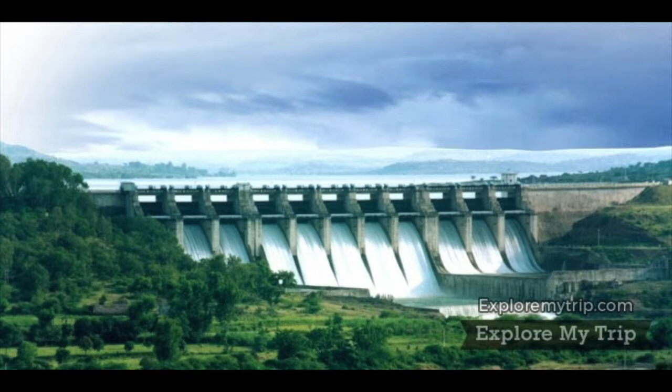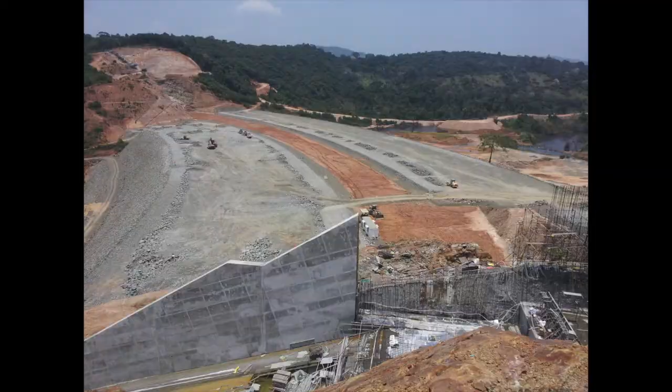It is an undisputed fact that irrigation plays a key role in the development of states where more than 50% of the population is dependent on agriculture. Heavy project costs, land acquisition, forest clearances, rehabilitation, and resettlement issues are the main constraints limiting development and giving rise to social discomfort. Needless to mention, a number of water resource projects suffer time and cost overruns on this count. The issues of consistently reducing per capita availability of water and the impact of climate change are factors sharpening the edge of the challenge.

It is submitted that the indigenous technology, namely MRIVAP - Mata Ramai Irrigation Value Addition Program - is a boon, addressing all the limitations, constraints, and challenges to a considerable extent, ultimately facilitating accelerated irrigation development while upkeeping various policies. The technology is at scaling stage on various projects in the state of Maharashtra. This is a sincere attempt to take the technology to various states for accelerated national development.

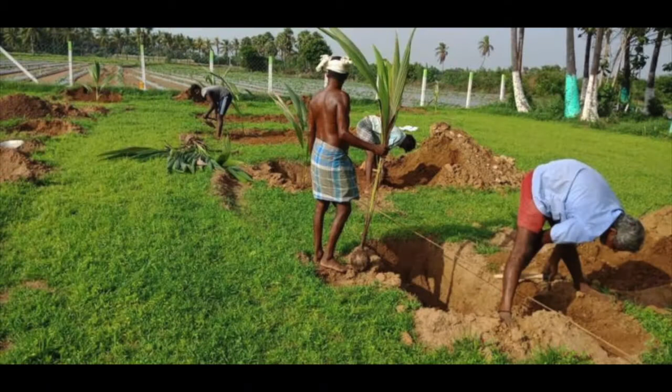It is submitted that the technology is significant for all - completed projects, ongoing projects, and future projects too. In the prevailing practice, it is necessary to acquire lands for submergence - lands falling below the acquisition line, which is the FRL line for minor irrigation projects, and FRL plus some increment like half flood lift for rest of the projects. This attracts heavy expenses towards land acquisition, compensatory afforestation, and rehabilitation and resettlement. This mechanism also gives rise to time and cost overrun due to opposition by landowners, fund shortages, and forest clearances. The present methodology also has its own limitations over evaporation losses and environmental resilience of the project. These factors are also addressed through the technology.

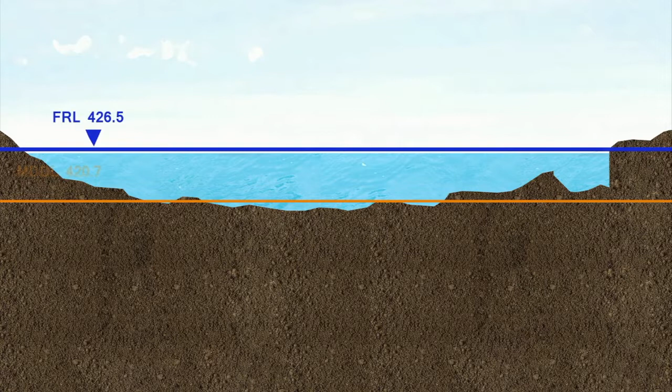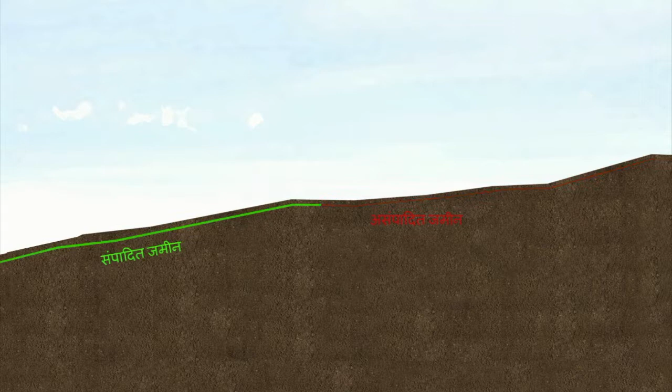In this technology, the earth, soil, silt, and murum from the submergence area is excavated and laid in the fringe area, in the land belt between the acquisition line and a contour selected below the FRL. The top of the bank work is raised up to maximum wave height plus 150mm, and in some cases up to MWL. An earthen bund or murum blanket with 20cm thick stone revetment is constructed towards the water retaining side for giving stability to the reclaimed land.

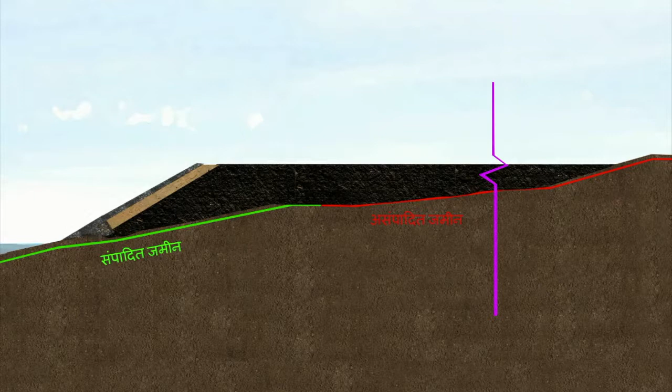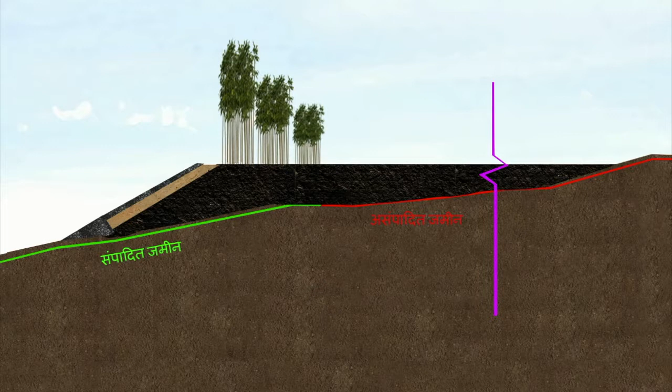RCC or pre-stressed concrete retaining wall, or sheet piles, or any other retaining structure can be a substitute to the earthen bund or blanket, depending upon prevailing circumstances. Fast and tall growing bamboo of proper species is grown in a narrower width of 10 meters towards the water retaining side, to act as an effective windbreaker.

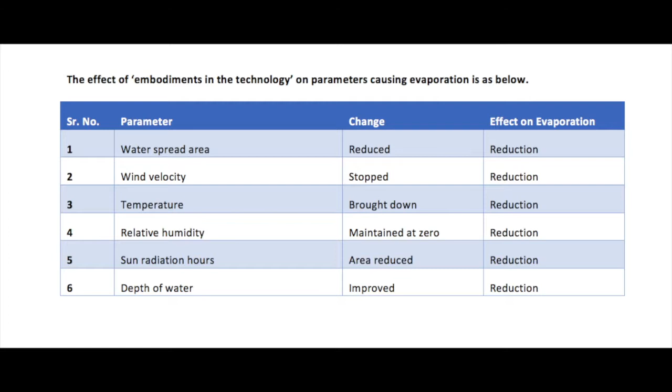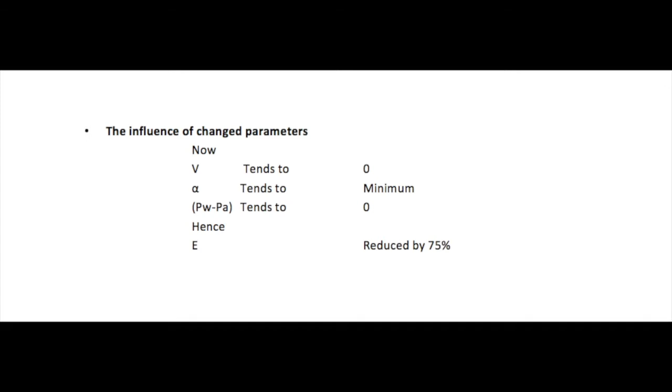The effect of these embodiments in the technology on parameters causing evaporation can be seen from the table. As seen in the table, every parameter has had a positive impact on reduction of evaporation. The main parameters are water spread area and wind velocity, among others. The retardation is assessed through a mathematical model, Dalton's fundamental equation. Here we can see that V tends to 0, alpha tends to minimum, and PW minus PA also tends to 0, and hence the reduction in E is 75%.

The influence zone of the windbreaker area is always questioned. Please refer to the figures - the influence area is 25H. The triangular zone is a quiet zone, necessary to maintain the difference at minimum, and beyond this is the turbulent zone. Now refer to the next figure - in this methodology we have the windbreaker on both sides. This arrangement causes horizontal flowing of wind current instead of downward flow as in the earlier case.

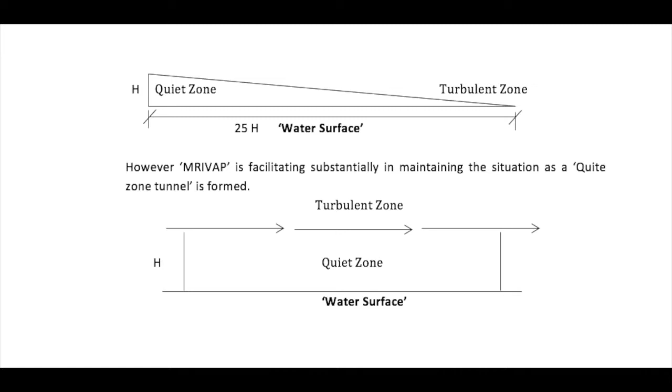This ultimately widens the silent zone. The possibility of water cyclones is eradicated in toto, adding premium to the saving. The above explanation clearly shows that more than 80% saving at zero operative cost can be achieved through MRIVAP.

Benefits caused or social impact through MRIVAP. As stated above, MRIVAP is beneficial for all projects, that is, completed, ongoing and future projects. It can be seen from the following factual examples.

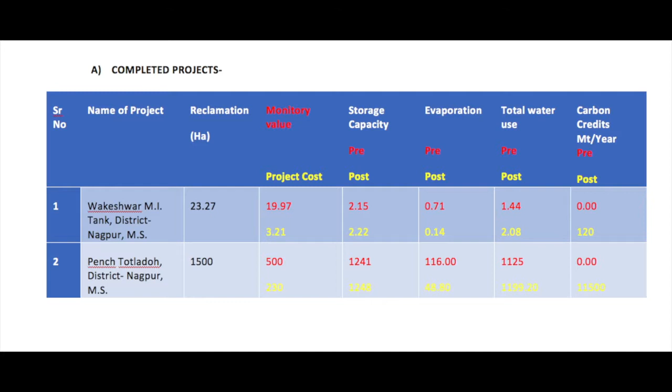We can see land costing about 20 crore and 500 crore is reclaimed in just 3.21 and 230 crore respectively. The tune of capacity restoration and evaporation saving can also be seen. Here, we can see the project cost is drawn down to less than 50%, that too eradicating the need to acquire lands. The storage restoration, evaporation saving, and environmental benefits are additional ones.

We can see that the lands costing more than investment are reclaimed and assets are created, or acquisition is substantially saved, reducing the project cost. Substantial evaporation reduction and capacity restoration augments project efficiency.

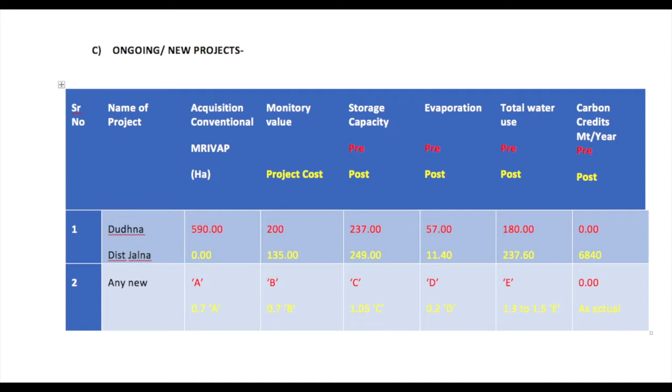Through carbon sequestration, clean and green energy, the project becomes environment resilient. The land reclaimed, additional availability of water, carbon credits, and carbon biomass are the newly generated sources of income.

Methods of implementation through PPP and farmers' beneficiaries' participation. Tourism development in WR projects.

The development of tourism in water resource project is the policy. Accordingly, all the WR projects in closer vicinity of tourism-intense locations can be developed just by calling EOI. The entrepreneurs may come forward if some lands are given on long lease to him.

Development of project by Ayurveda pharma industry, seed industry, agri-processing units, dairy farms and likewise. These industries require fertile lands with assured irrigation support. The industries will come forward if such reclaimed lands are given in concession agreement to the investor. This method also causes opportunity to the local farmer in the cultivation activity.

Agro gas industry. Recently, the Union government has declared creation of 5,000 agro gas projects in the country. A corpus fund is created and a subsidy of 35 crores per project is eligible for each project. Bamboo is the excellent raw material, and hence these projects can be developed under the scheme.

Farmers' participation. A cooperative society of the farmers whose lands are eligible for reclamation should be formed, and the WRD should give rights to the society to develop the project and utilize the lands for long-term lease period. The society will raise their own funds, engage their consultants, get the project approved by competent authority, and complete it.

The society will enjoy the use of lands and water at very cheaper costs, and the government will enjoy additional command, also climate change benefits.

Social impact. Highly fertile lands will be available to the farmers, which will boost agricultural and rural economics. The additional irrigation will cause benefits to more farmers, causing accelerated benefit to agriculture sector.

The PPP and farmers' participation will reinforce the rural economy in accelerated manner and also create employment opportunities in rural area. The bamboo cultivation and value addition causes strengthening of rural economics.

Checking climate change will improve the rainfall cycle, also will improve the agricultural productivity. The lands or forests saved from acquisition and the lands reclaimed will be a lifetime asset for food and grain production. The saved project costs and improved water use efficiency will improve the GDP.

As already discussed, the technology is at scaling stage in Maharashtra. We request the dignitaries to please do the needful for facilitating the policy decision in the state for accelerating the irrigation development as per various policies.